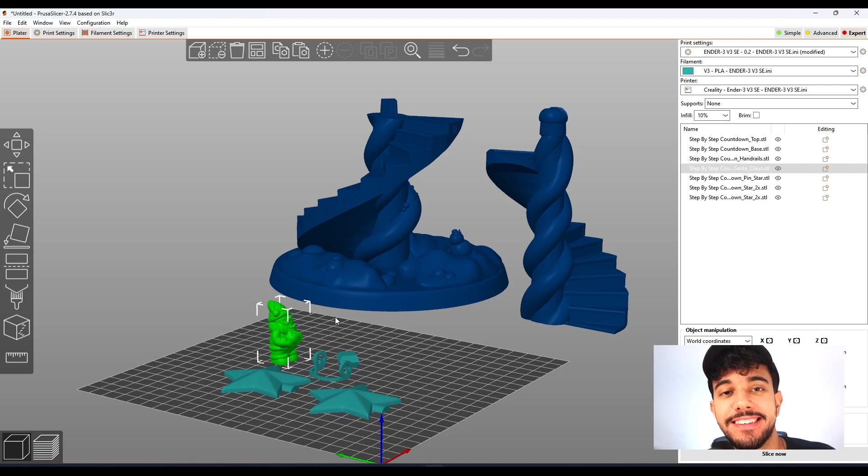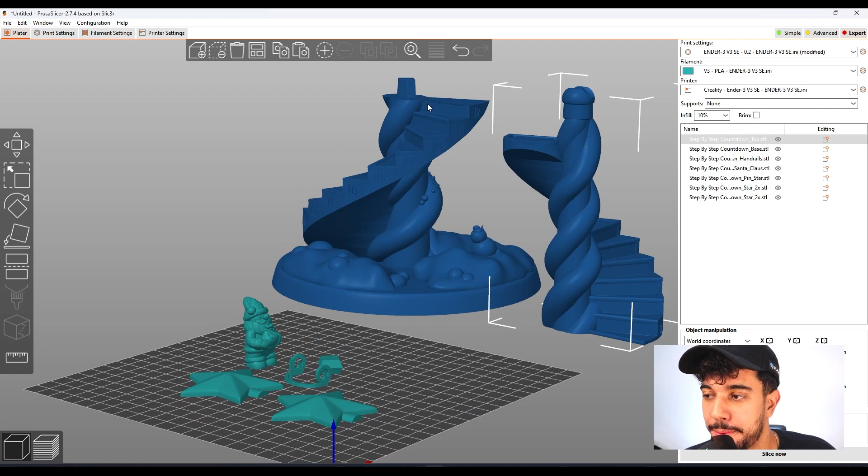So this is the step-by-step Santa Claus countdown. As you can see, it could be called count up because the Santa Claus is going to be going up, but it is a countdown until Christmas.

So this is a really nice model to print, and in this video we're going to be checking out the best print settings to print it.

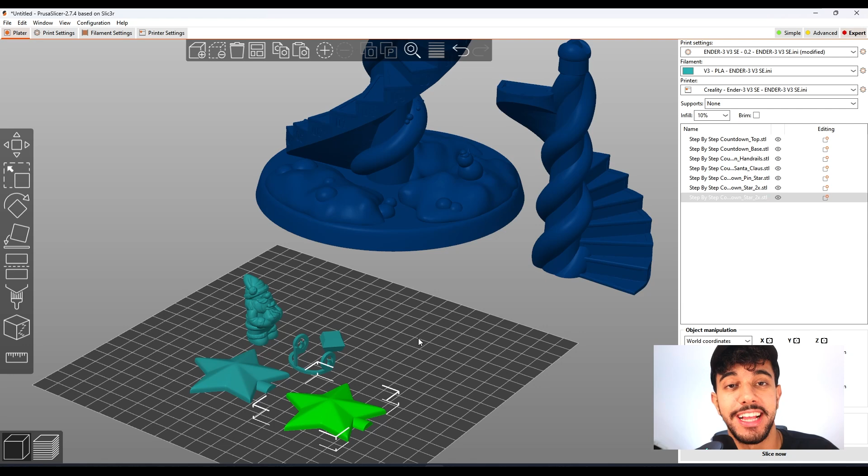So let's go. Before we go to the stair itself, we're going to be taking a look at these tiny parts right here. What we're going to be doing is printing them first, just so I can show you, because this part is really critical.

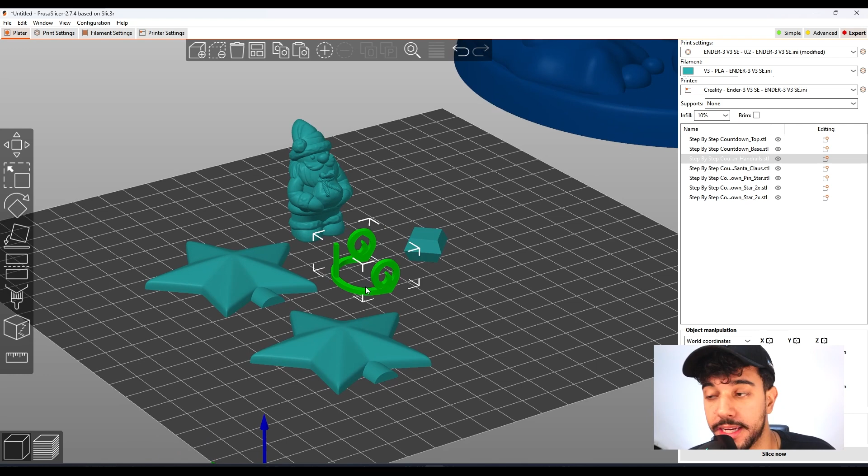We're going to be adding brim and we're going to be reducing the speed to print it, because this is a really small part. I joined all of these in the same build plate because we're going to be using different configurations to print compared to this one. So let's go to the print settings.

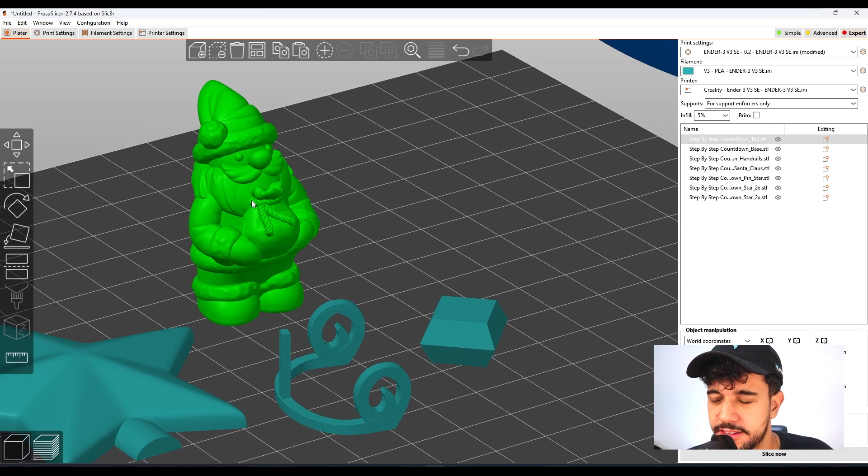Going over to layer height, we're going to be printing this part at 0.14 millimeters or 0.16 millimeters. This way we're going to get a good quality print, especially on this small Santa Claus, because this is a really tiny part, we need to reduce the layer height so we can get a good quality print and help print these parts that are really pretty and need a good quality result.

Going back, we're going to be printing with 3 perimeter shells. This is quite nice, 3 vertical shells. Going over to 10% gyroid.

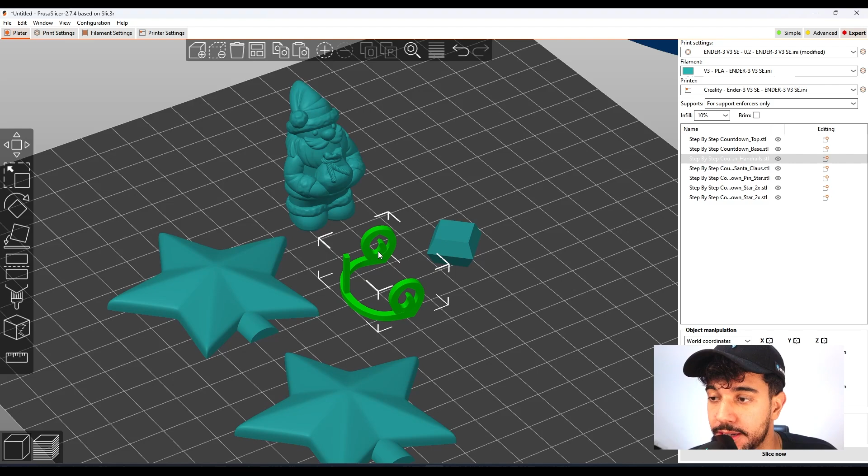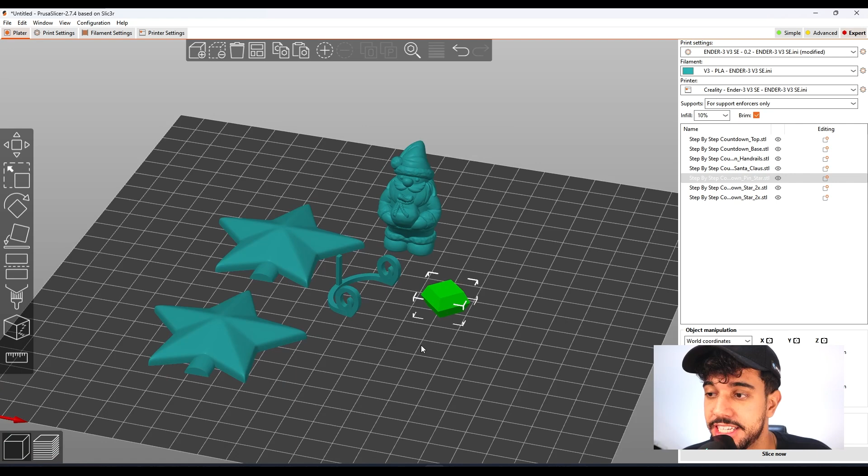We're going to be adding brim, but especially to this one. We do not need to add brim to all of them, but let's do that just to avoid some of these prints unsticking from the build plate. Talking about brim, it's a really nice feature, so we're going to be adding a 4mm brim just to increase the surface area of contact to the build plate right here.

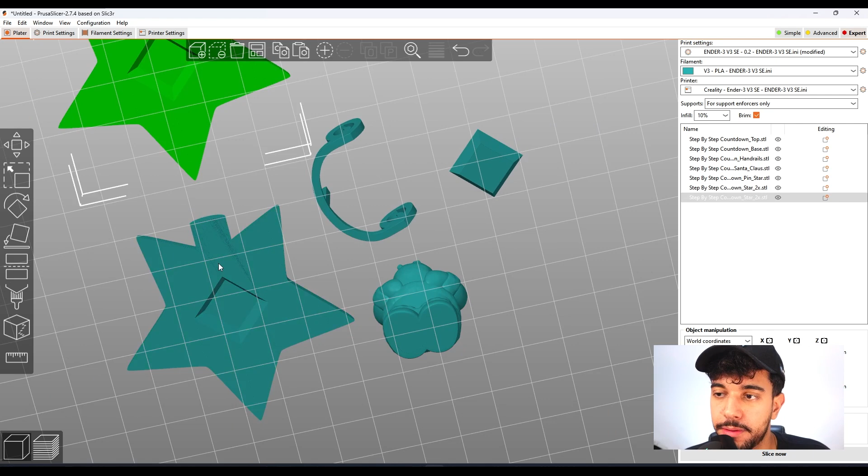As you can see, this part doesn't have a good area as the Santa Claus, because the Santa Claus is quite tall compared to the surface area of contact to the build plate. We wouldn't need any brim for this part right here, but we're going to be adding just for safety precautions, and to this connector to attach both of the stars.

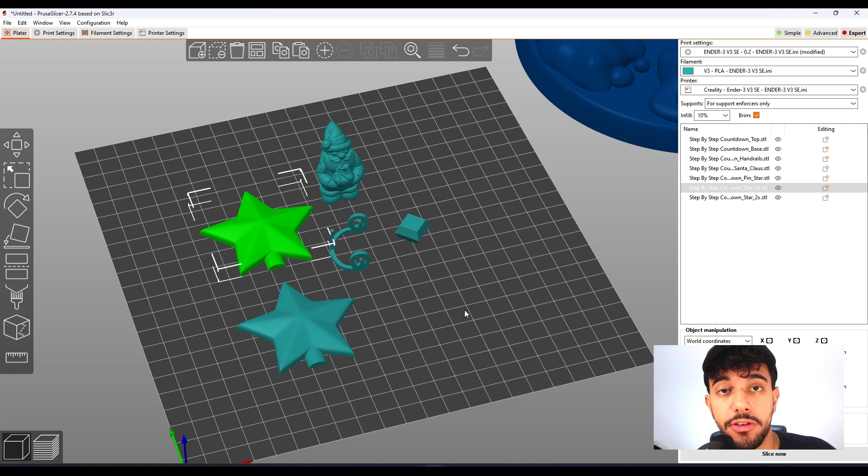What I'll be doing is actually adding brim, but if you have some bad adhesion issues, I do recommend always cleaning your build plate with some isopropyl alcohol or detergent, because dust and oils from your finger will impact the bed adhesion.

Because this way, if your build plate is not clean, you're not going to have a good first layer. It's going to unstick really easily, and you're not going to have a good quality print.

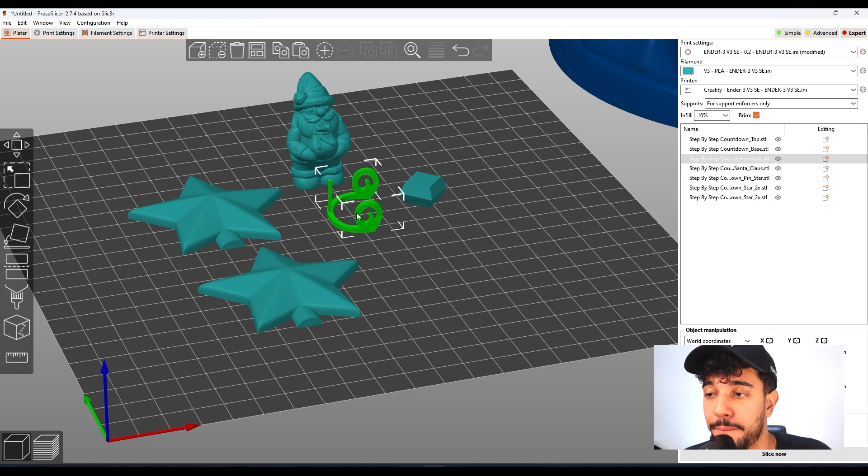And I would recommend having your printer really well leveled, so you can have a good first layer, because the first layer is the most important layer, because all of the other layers are going to go on top of this one. So if the first layer is not good, you're not going to have a really nice and solid print. So we have added brim to this build plate right here.

All of these models will benefit a lot. And going over here to the print settings on support material, we're not going to be adding support material because these models are optimized for printing and they do not need any support.

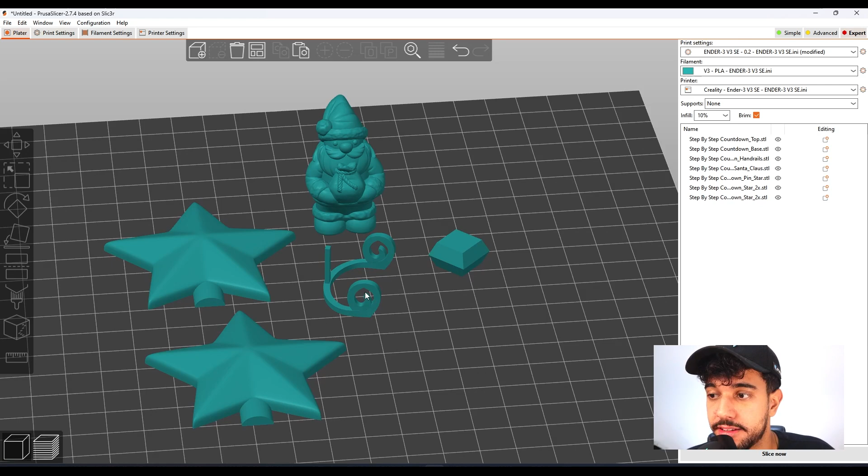Going over to speed, I will recommend reducing the speed. On BambuLab printers, I do recommend printing at half of the speed, especially because of this part right here. So this needs to be really slow to print it.

So going over here to small perimeters, we're going to be reducing to 50 millimeters, and for BambuLab printers you can be printing at half of the speed, and make sure that your first layer speed is at around 20 millimeters a second. This way we're going to be printing a low value just to get a good end result.

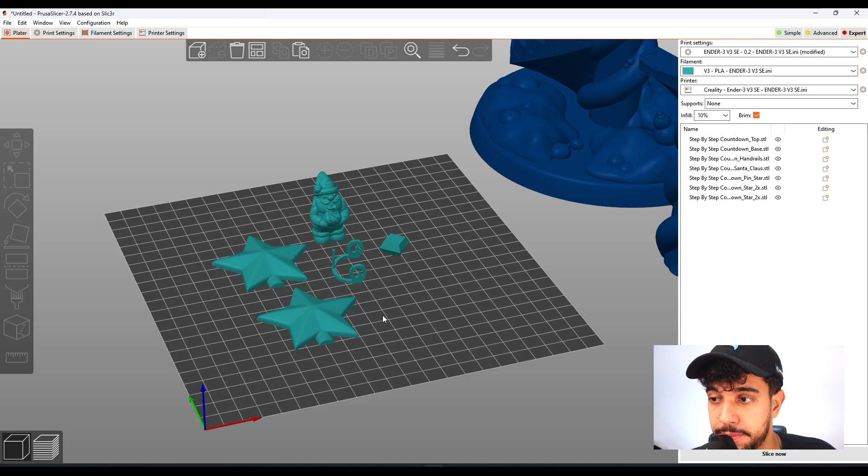We're just going to be printing at this speed for this part. The other parts we're going to be printing at standard speed. Let's just slice and take a look.

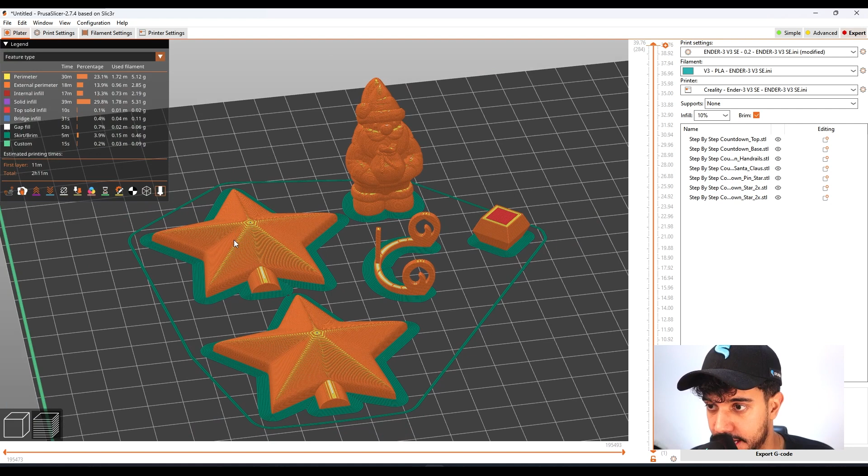As you can see, we have sliced and it's going to take 2 hours and 11 minutes to print. We have added a custom brim just to help with this part right here and the Santa Claus, and make sure that our star is going to print correctly.

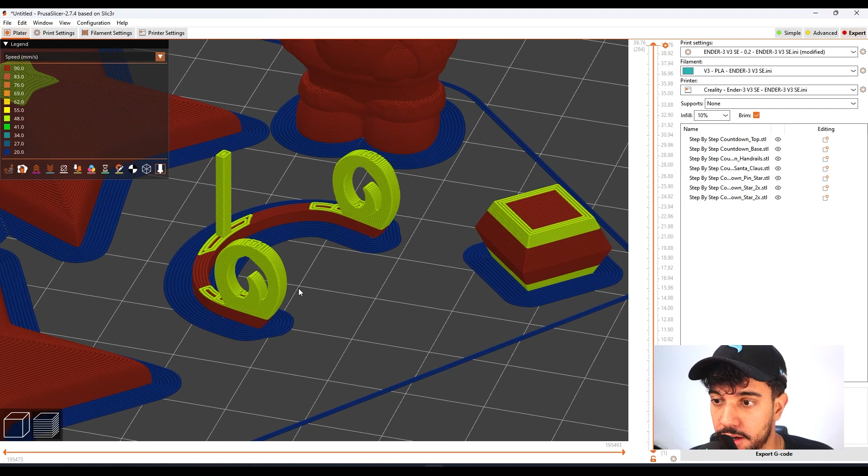If you go to speed, you'll see that it reduces a lot of the speed while printing this small perimeter, to around 50 millimeters a second. This way we're gonna get a really nice quality print, because this is the most critical part. You can even lower down the speed if you may like.

So let's go to the stair itself. Let's start with the lower part of this stair. This is quite nice. Let's go to the print settings and we can just untoggle this.

We do not need to reduce any of the speed. Going over to support, we do not need any support. All of the parts right here are at an overhang that your printer can print, so we do not need to consider any support. Going over to brim, we do not need any brim because this model's got a good surface area of contact to the build plate.

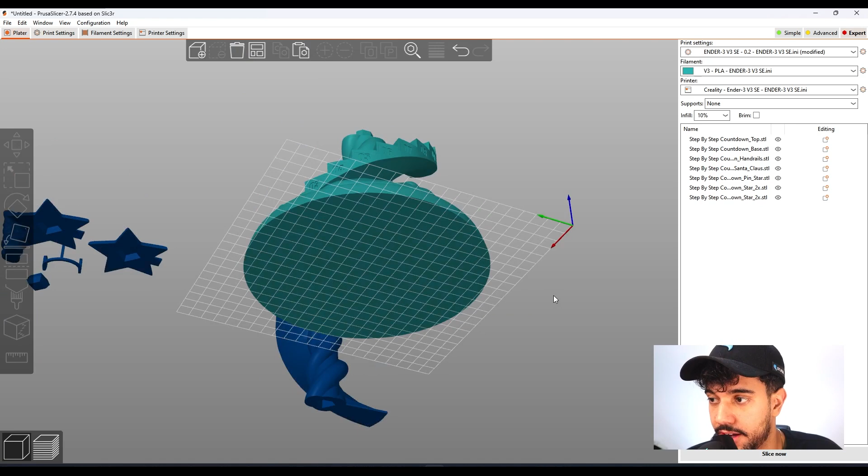Going over to infill, let me just see. Okay, no, don't generate support. Skirt and brim, we do not need any skirt, neither brim. For infill density, we can be printing at 10% with gyroid.

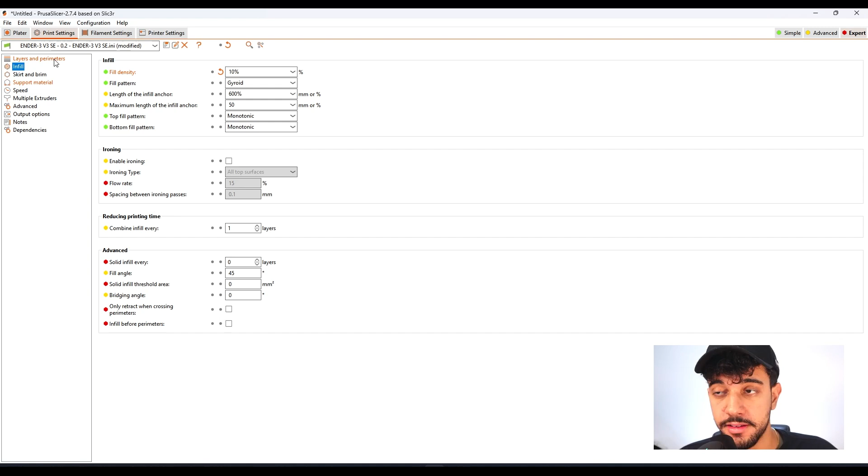So we're gonna be saving a little bit of filament in this big part, and we're going to be getting a really dense print. Right here, we can be printing this model at 0.20 millimeters, so we can get a good quality print and with a nice time of print. It's not going to take too much time to print.

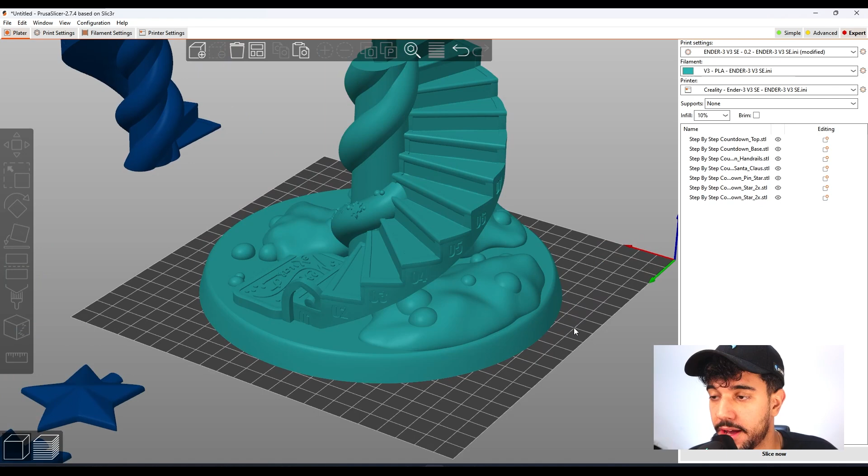This way, we do not need to lower down this value because this is a really big print. It's going to be really hard to see those fine lines of print. So let's just slice, and this top part right here, we're going to be printing exactly the same. We're just going to be adding brim.

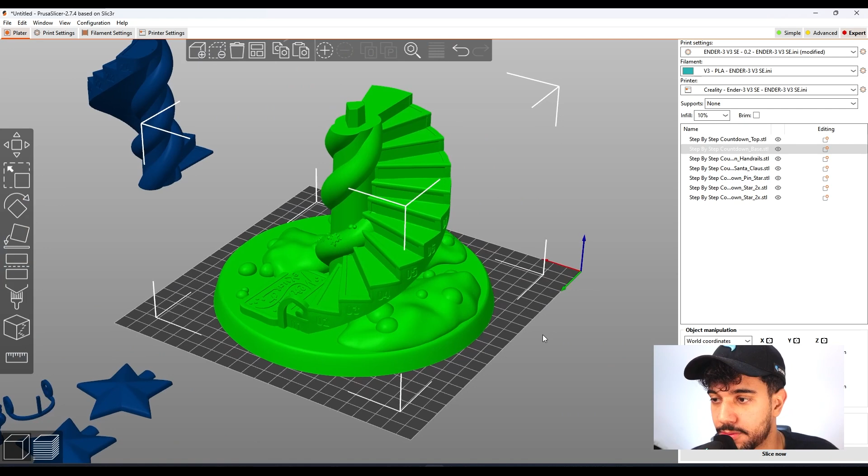But first, let's talk about this one. Let's just slice. So as you can see, we have sliced and it's going to take 16 hours and 24 minutes to print. It looks perfect.

If we go down the layers, you see that it's going to be printing at 10% infill, and we're going to have a solid print. Let's go to the last part of our model.

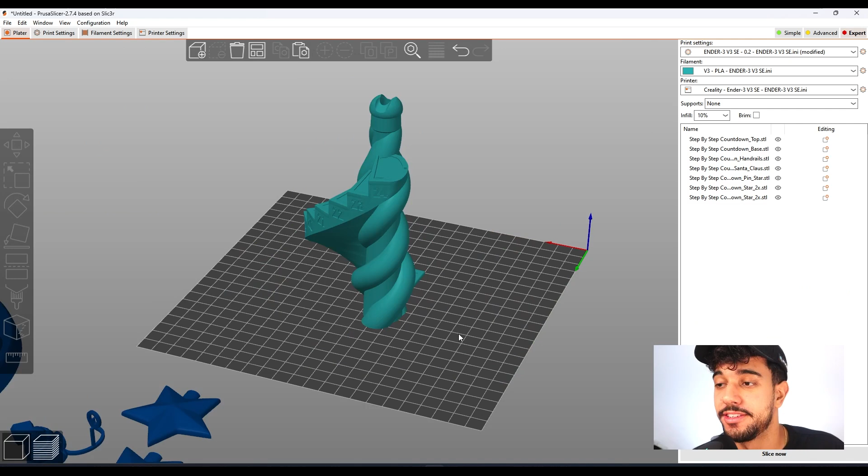As for this final part right here, as you can see, it doesn't have the best surface area of contact to the build plate, especially because this is a really tall print. I would recommend adding a little bit of a brim if you have some bad adhesion issues.

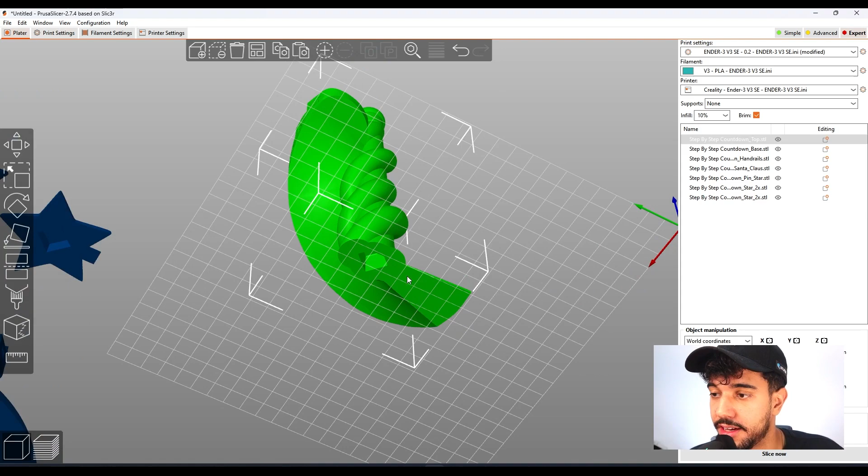So we're going to be printing exactly the same as the other part, the bottom part, but for brim, we're going to be adding a 5 millimeter brim just to increase the surface area of contact to the build plate. So let's just slice and take a look.

As you can see, it's going to take 5 hours and 25 minutes to print. We have increased right here the surface contact to the build plate. So it's going to be printing with the same configurations.

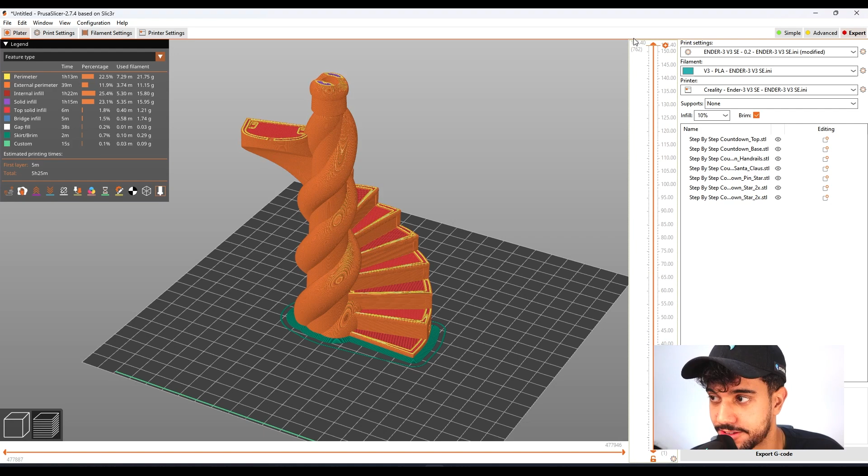Looks quite nice. Your printer can print this overhang really well. If you have some bad adhesion issues, I would recommend going even more with the brim, but this is going to be a safe route.

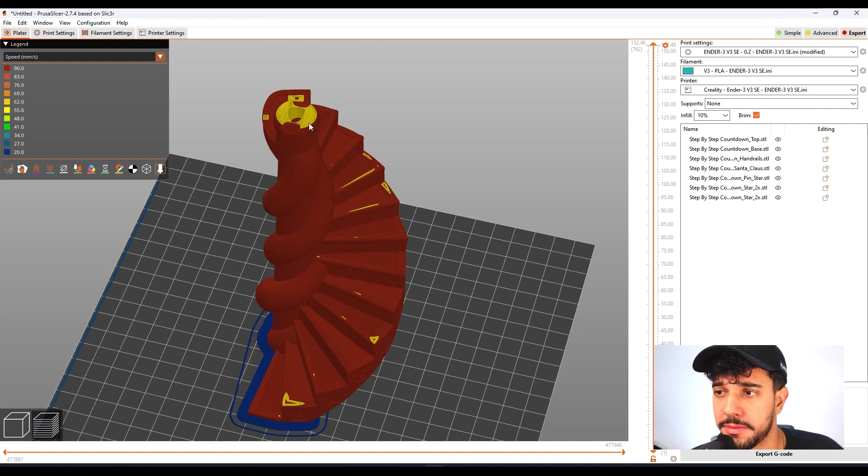So if you take a look, let's just take a look at the speed. It's not going to reduce too much of the speed for small perimeters, just the lower part shows some small perimeters. So grab a really nice filament that you have laying around and print this model because it's awesome.